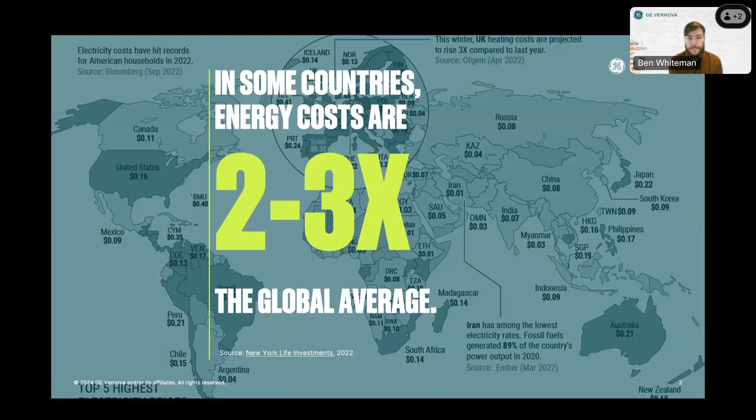So in my role, I talk with customers in quite a wide variety of industries. And one of the common challenges that we hear from customers is the role of energy. Not only is it ubiquitous in most industrial facilities, not only is it required to run most machinery and processes that our customers use, but the costs are increasing tremendously in recent years in response to different geopolitical tensions, in response to the increasing trend toward electrification and the global energy transition. And energy costs are becoming incredibly expensive, but also volatile.

And while energy understandably gets a lot of attention, given its penetration in our lives and for its role in carbon emissions, many of our customers in the water wastewater space, as well as those who are industrial water users, are confronted by challenges with respect to the water that they distribute, manage, rely on, either to produce their products or to run their facilities. And many of our customers are finding themselves operating now in water-stressed regions. And the costs with managing those risks are high, and they're expected to continue to increase in future years as weather patterns change, as water management practices change, and as policies emerge and change as well.

And some of those policies, in response to these resource supply risks, in response to drought and increasing water risk, we're seeing a lot of jurisdictions adopt new policies around resource management, particularly around water, around reducing waste and driving for greater utilization of these resources through circular economic models and circularity policies. And I'll speak a bit more about that if that's unfamiliar later in the presentation. But we expect these are only going to continue to grow in importance and in prevalence.

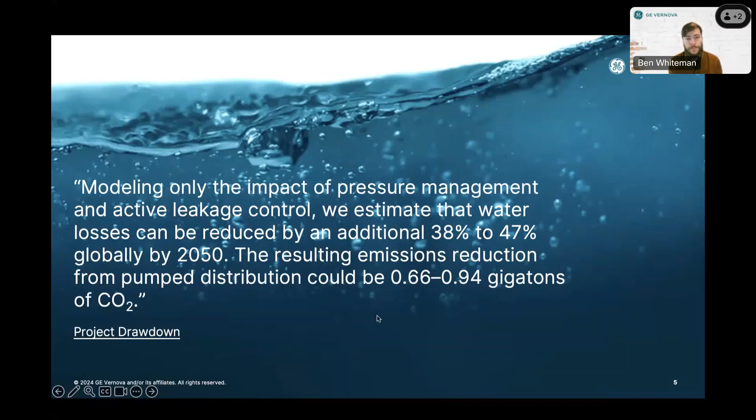And beyond the importance of water itself, the management and distribution of water is incredibly important in abating these issues. Project Drawdown, which is quoted here, is a leading climate solutions research organization. And their research on managing water systems and controlling leaks clearly shows the tremendous climate impact that good management and technology-enabled management of water can provide. So I'll now turn it over to Prasad, who will talk about some of the more specific challenges to the water wastewater space. Prasad, over to you.

Sure. Thank you, Ben. And before we get into more of the circularity aspects of it, what's the opportunity, what can we do, and understand the circular water cycle, what I wanted to do was spend some time on the current challenges and goals with water wastewater utilities. From what we see talking to our customers and participating in industry think groups, the challenges around water wastewater are usually around these three pillars, which is making sure there is a continued service. There's an increasing reliability in how the operations occur.

There's obviously a reduction of cost, but those could be a variety of different aspects in terms of where the cost comes in. Ben talked about energy. There is a significant amount of cost that goes into the chemical usage for treatment. We're seeing more and more customers now focusing on what they call non-revenue water, which is really the leakage that happens as water travels through the systems, and the water that is lost that cannot be billed by these utilities to consumers or to industrial customers, as an example. And then the bigger aspect of operating a utility, operating what we call a critical infrastructure, is really the minimization of the risk.

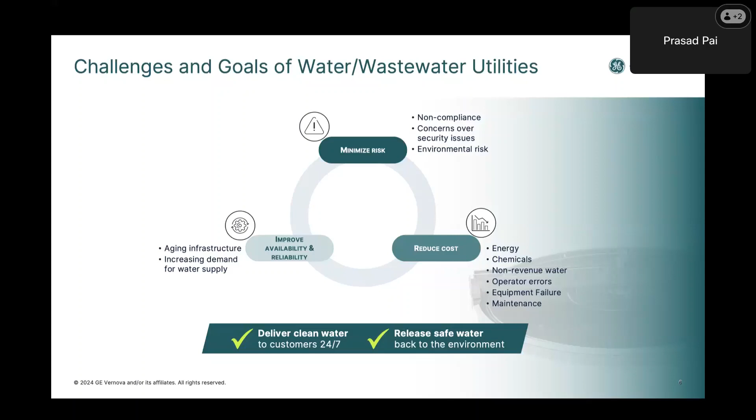And there have been several customers who have kind of moved towards trying out analytical solutions, trying out what we call smart technologies, to see if they can solve some of these challenges that they have. But what we are seeing from different analysts that are analyzing the market, different studies that are conducted, is that only about 12% of the utilities really see themselves as early adopters.

A very large part of the industry is still catching up from technologies implemented back in the early 2000s. There are some utilities who are even in the 1990s in terms of the technology that has been put in when the utility first came online. So there's a lot of struggle in terms of just getting more to the current standards of what is available in the market in terms of the solutions that they implement.

One of the reasons why Ben was also focused on energy, and he'll talk a little bit more about the circular aspects of water treatment here: almost 25 to 40% of the energy used by municipalities is in treating the water. And it's related to the pumps that are operated, whether they are the most efficient ones based on maintenance, or they draw a lot of energy. There's a significant amount of cost that goes into that.

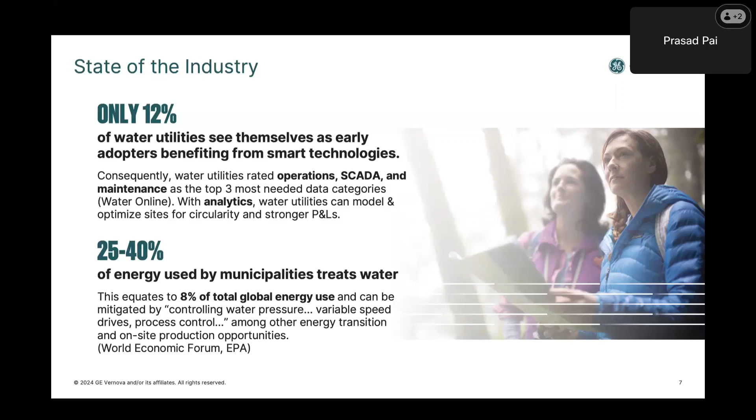And here's a quick study. I'm not going to spend a whole lot of time. Here's a quick study on just the cost that a water utility goes through when it comes to potable water treatment, right? As you see, energy and chemicals are a significant amount of costs, and there are efforts going on. There are certain utilities who are further ahead than others in terms of technology adoption, and have tried different solutions.

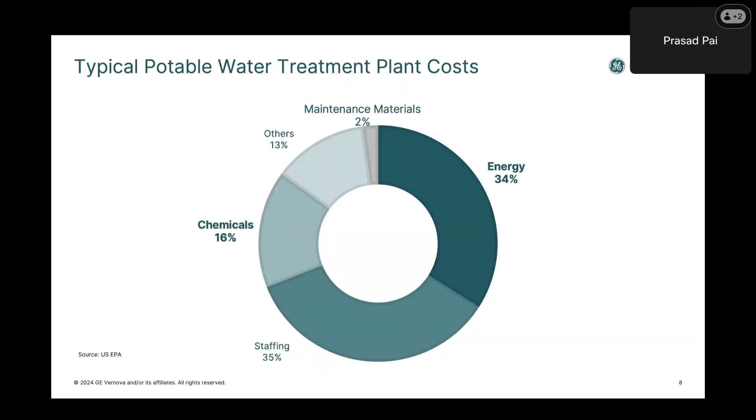And one of the things we wanted to bring forth is just examples of what can be done. What is the opportunity to get to what we call smart resource management when it comes to the water wastewater industry? So just a few examples before I turn it over to Ben for circularity. As we look at smart resource management, everything from a solution standpoint starts with data.

And water wastewater systems as implemented today, all water wastewater customers store data, they collect data, they're trying to find ways of gathering more data about their systems. I think the difference between water utilities that are further ahead in terms of their solutions versus water utilities that are lagging in some of these efforts is really what have they done with the data, or how accessible the data is to the people that really spend time analyzing these different systems. And that's where the difference lies.

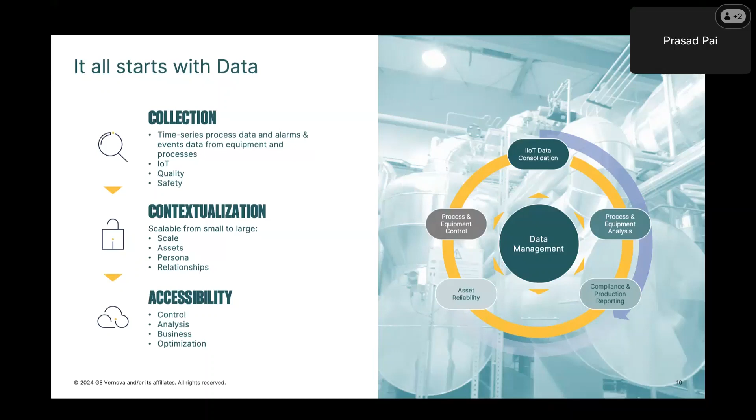And that's why when we talk about data, it's not for the lack of collection of data or the amount of data that is stored from the operations. It's really, can you make sense of that data? Is it stored in a way that it can be accessed by higher level systems, or can be accessed by people who can make sense of the data? And that's where the journey of smart resource management really begins.

And as we think of most utilities, it's a cycle as you see all of these systems being implemented. A large part, I would say almost 90% of our water wastewater customers, are at the basic controls level. That's where their focus is. Whenever there's a budget, it's easier. It's a capital budget. That's where they spend most of their money, to ensure they put in cybersecurity practices. They put in the latest controls. They ensure that the controls are reliable, the system is up and running, and providing water to consumers on a continuous basis, and good clean water is obviously the focus.

Slowly the industry is starting to realize that there is also a cost saving to be had if we can start to analyze this information, if we can start to operate more efficiently, if we can start to predict what may be causing equipment failures, or what may be causing increased energy usage as you treat water. And that is the journey that water utilities are just beginning. And one thing obviously is the fact that a lot of these water utilities lack the skill set when it comes to implementing analytics.

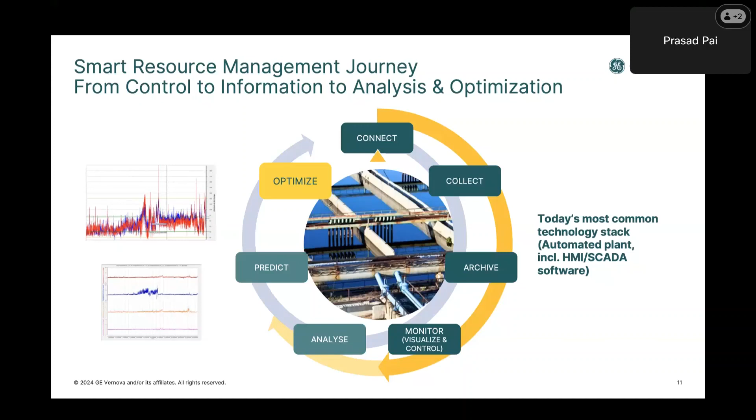And what I wanted to do here, before we get into circularity, is really look at some simple things, some low-hanging fruit that our friends in the water industry can do. Now, this is a very simple use case around a pump that goes into a treatment station. I think most of you would have seen this happen, where over a period of time, wastewater pumps, their efficiency starts to go down, or due to corrosion, there are bolts that wear off, which causes a breakdown in the pump.

And some of the problems with these pumps could just be that it's downtime. Usually with water and wastewater, there are spare pumps that you operate, but it's a cost and it's a downtime. And if the pump has not gone bad, if the efficiency is down, it starts to draw a lot more energy. So the question is, how do you start to detect that this is what is happening?

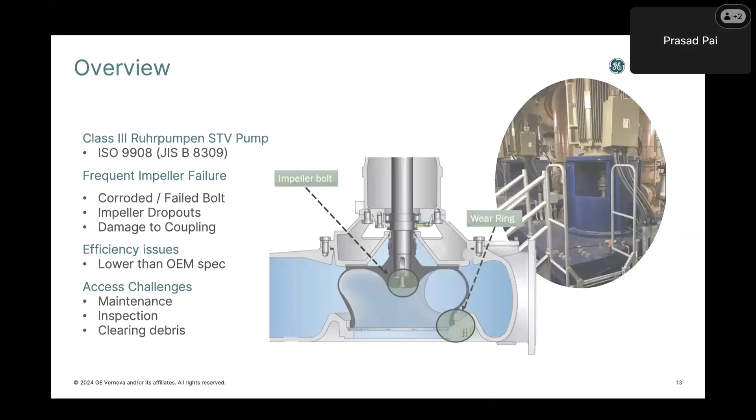So as you start to collect data, as you start to understand the behavior of the pump, you start to look at the pump curves of how the pump is operating, and this is where analytics can help. And this is where knowing what data is getting stored from the pump, or what data would be needed to get into such analytics, is also important. In fact, a lot of the data is not collected. There may be certain things that from an input standpoint already come in from the pump, but are not looked at in the systems. It's not collected. It's just informational for a lot of water customers.

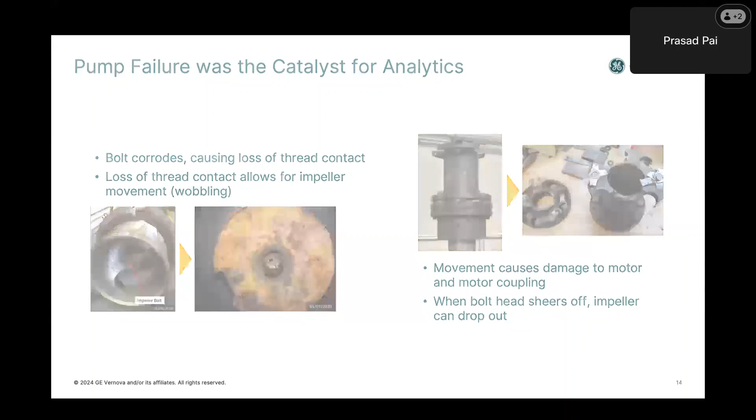So just knowing what is possible, and this is where you think of simple algorithms. All of us are very familiar with AI and ML today. A lot of customers have been asking us, can ChatGPT help us with some of this? Well, obviously for analytics to work, the data has to work. We have to ensure that the data is there. But as you start to analyze some of this, the analytics can start to compare the normal behavior of the pump with the existing behavior of the pump, and it can start to predict the anomaly.

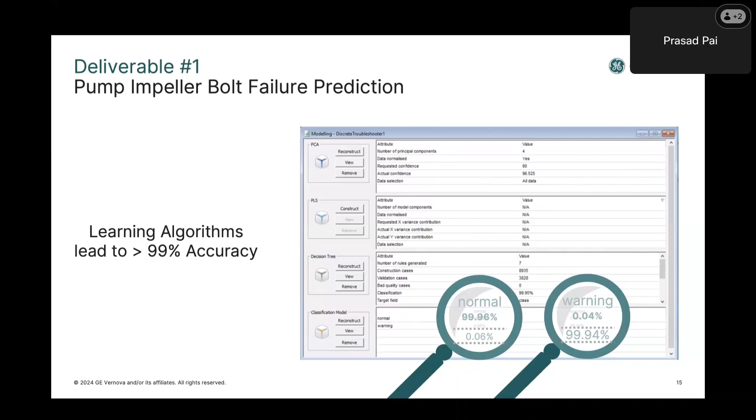You can set at what point the analytics starts to flag an anomaly, so you are more proactive in maintaining the pump, or more proactive in cleaning out the pump or looking at what's going on, and that can help with improving the age of the pumps. It can help maintain a better efficiency that reduces the energy usage as well. And these are just simple examples that customers have used. And there are various tools out there. There's no one analytic that does this better than the others.

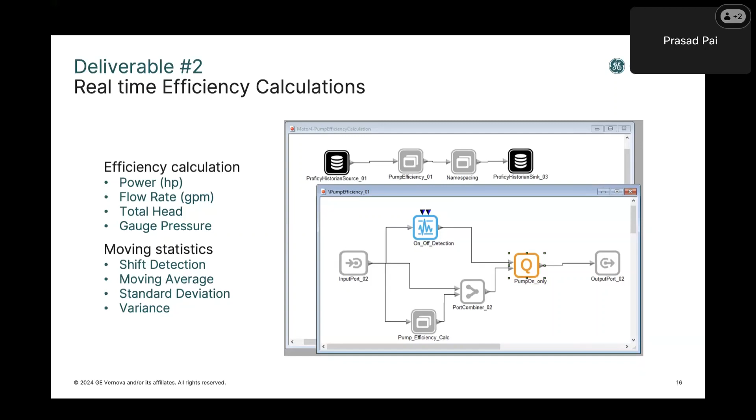A lot of it depends on the resources that the water utility has, either within their own engineering teams or with the system integrators or the engineering firms that they work with. Looking at what resources they have, you can go with analytical models that look at your history, but also do a comparison of your historical model with the real-time information that you're starting to get.

So if there's an alarm, if there's an intrusion alarm, if there's a leak, if there's a pump break, then if your system also provides on-the-go instructions of what to do next for operators, that can save time, that can save money. You can guide the operator to take the right action at the right time, reducing the angst and the cost of that downtime that may occur.

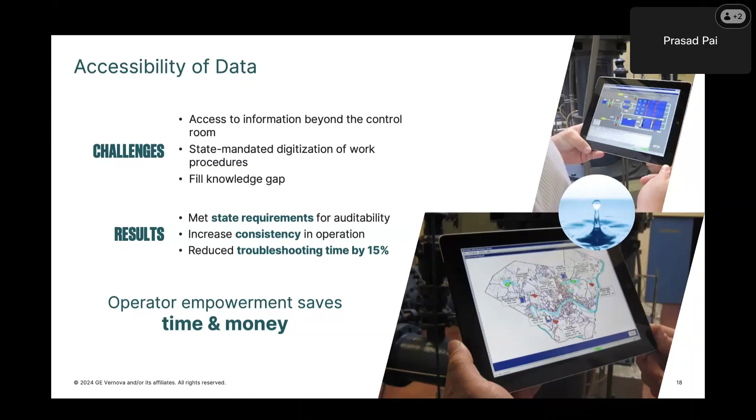So accessibility of the data is important. There are customers we know who have implemented systems that they call smart sewer, basically looking at how do you do stormwater management. And this is not a normal use case for a water utility to think of. Most of the thought goes into treatment of the water, or most of the thought goes into distribution of the water and ensuring that the tanks are filled, and at 4 a.m. in the morning, when someone turns on the tap, there's good clean water coming to the consumer.

But these are important aspects, because stormwater management can lead to efficiency in terms of how flooding, or just seepage into your water system, can be reduced or avoided if stormwater management is done correctly. And these are not short-term solutions. This is not something that you implement and you start to see a cost benefit immediately.

But over a period of time, you start to realize the savings, the cost savings in terms of treatment, in terms of just the overall energy optimization that happens across the system. This is not one pump, two pumps. This is an overall system-related benefit that you get out of some of these solutions.

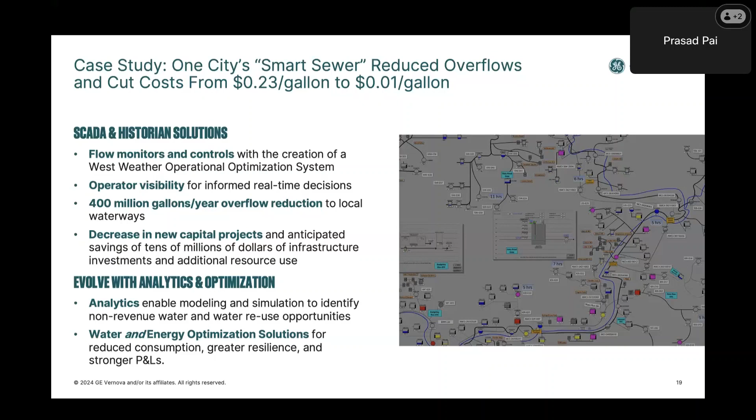So the idea behind presenting these use cases is, as you think about sustainability, as you think about circularity within water and wastewater, a lot of times we think of sustainability as a metric that only applies in manufacturing, or with consumers who consume finished goods in food and beverage, or products that you use from CPG. That's where there is a focus on sustainability, and consumers are a lot more active, and you start to see employees of those companies being a lot more active

in driving sustainability. But what a lot of people miss is the fact that there is an opportunity for the utilities to contribute as well, and a significant part of the cycle of sustainability can be driven through the utilities itself. Now, this is again an example of reducing the operating costs, or reducing the quality discharge from an EPA compliance standpoint, of solutions that people put in place. And this goes beyond just the control systems.

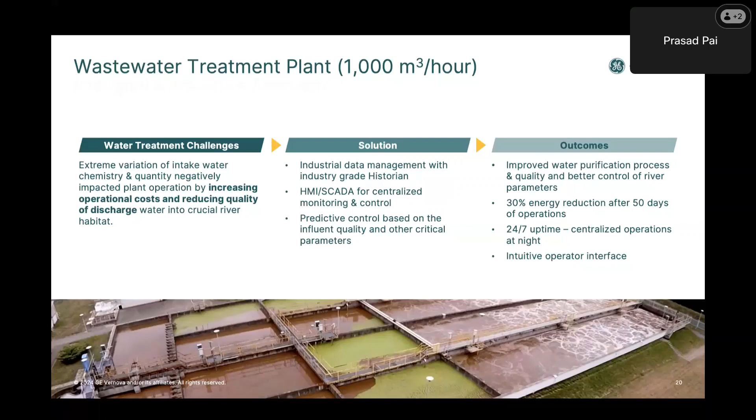And the idea behind presenting these use cases is to show the opportunity outside of just basic control systems, basic operations of treatment plants and water distribution, to see what is possible where there can be efficiencies, there can be opportunity for sustainability. And with this, I'll turn it over to Ben, who will go into a little more detail about what circularity in water looks like, how it matters, and why some of these solutions would eventually play into that role as well.

Thanks, Prasad. Yeah, and Prasad makes a great point that considering the opportunities for how your operation can be more sustainable not only drives improvements in efficiency, but also has direct relationships to your cost basis, to your P&L. Reconsidering how your organization can leverage digital tools to drive more efficient utilization of resources, smart resource management, leveraging data management, systems modeling, predictive analytics to more efficiently manage those resources and the assets that move them, drives cost efficiency as well.

So circular systems are another way to improve resource utilization and reduce costs. And when circular systems are implemented with these software tools, with these predictive analytics, with powerful data management systems, the results can be even more impactful. But let me take a step back for a moment.

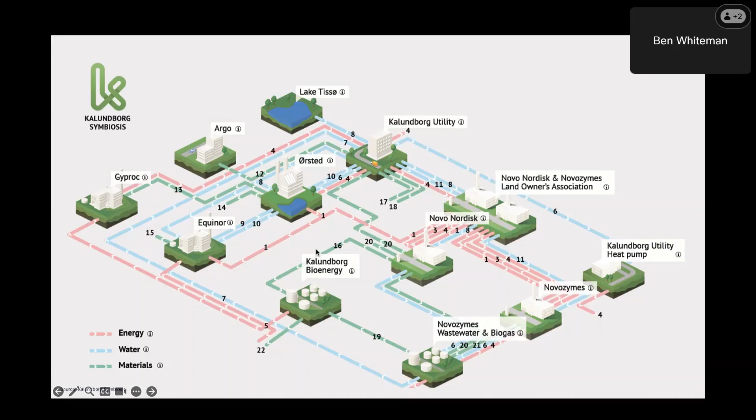And the circular economy aims to shift that paradigm and create systems which capture products at the end of their use, or at the end of their life, and direct them back into the economy through reuse, repair, remanufacturing, or recycling. And in the water space, this is just as applicable as it is in the manufacturing space. If we think about recapturing water at the end of its use and redirecting it back into the system, circular systems provide a focus on maximizing the utilization of that material.

And in the previous slide, you saw an early example of a circular system in place in Kalundborg, which is an industrial park in a town in Denmark. The energy and water and material that were used in one facility were matched with the needs of another facility or another use case.

You can imagine how that might apply in the water space, where we're taking water that's been used for one application and we're cascading it to another application, ultimately getting greater value out of the same material, out of the same water stream, which ultimately reduces both the demand, the net system inputs required, but also the waste that's generated.

So opportunities to actually implement this. Some of these things might seem a bit idealistic, but there are real opportunities to capture and create value, oftentimes reduction in cost or increase in revenue, by looking for ways to adopt circular principles. Those things could be cascading gray water from one application to the next, finding opportunities to recover materials, for example, biosolids, or leveraging waste materials, biosolids, for energy generation that can offset some of the costs of operating.

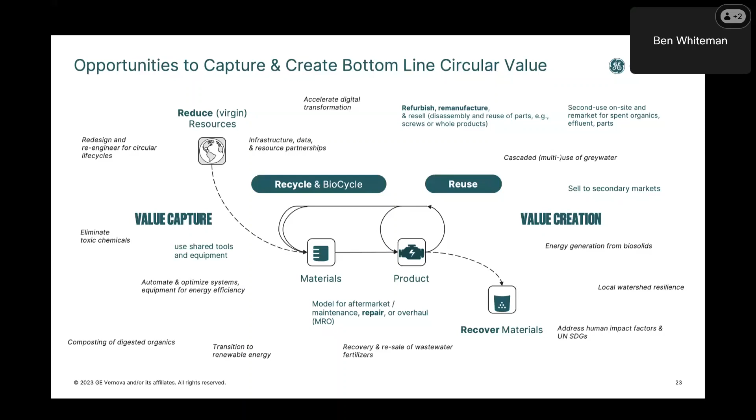So there are real examples in which chemicals, for example, can be recaptured. Fertilizers is a great example of this, and then resold. So there are very tactical examples in which applying circular systems in the water wastewater space can not only create efficiencies that improve costs, but also in some cases drive value creation and drive greater revenue.

But how do you begin? Beginning is often really, really challenging in these larger systemic paradigm shift type initiatives. And many of our customers are adopting circular resource management goals in order to improve their environmental impact, in order to reduce waste and costs, in order to increase the utilization of resources. But acting on those initiatives, acting on those goals is extremely challenging.

And digitization can be a crucial enabler in moving from a goal, an idea that sounds great in theory, to a practice and a policy that drives it on your plant floor or in your facility. This is especially true for industrial water users. Measuring these flows, collecting the data on the quality of the water, the composition and the quantity, is a key first step in creating greater utilization of those streams. And it's foundational to optimizing the utilization of that water.

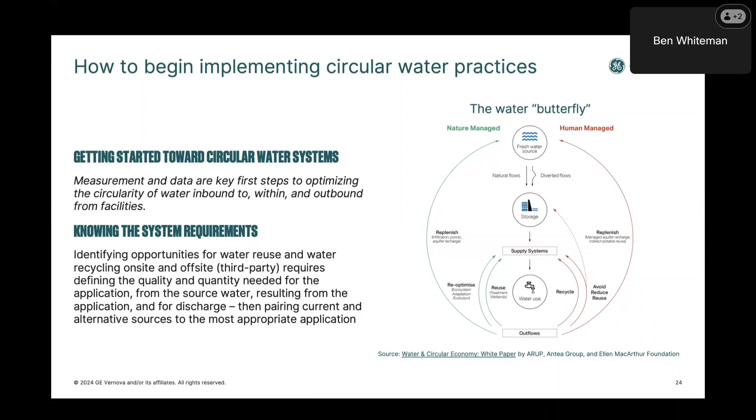Also important is defining the requirements for use at each point water is needed in the system, so that applications using water inputs can be matched with outflows that have the appropriate characteristics for that application. And this is where data management can be extremely helpful in driving the creation of these systems. And extending those operational data systems to capture that data, to manage that data centrally, and ultimately to make it accessible for AI and ML tools, different analytics tools, does drive tactical actions that can be taken to improve water stewardship and help implement more circular systems within your facilities.

So in summary, Prasad spoke to the value of data management in driving efficiencies, making issues known to the operations teams and driving faster response time, identifying sources of variability or waste, and how that data can be made available to analytics to move from recognizing that there's a problem potentially after the fact or just before it happens, to actually predicting and anticipating these problems and optimizing these systems holistically.

Applying digital tools to smart resource management or extending those existing operational systems that may already be in place on the plant floor to an organization's water and energy management initiatives can not only help to deliver improved efficiency and reduce costs, but also better sustainability performance. These capabilities are crucial to implementing circular systems in the water wastewater space and monitoring and evaluating their performance.